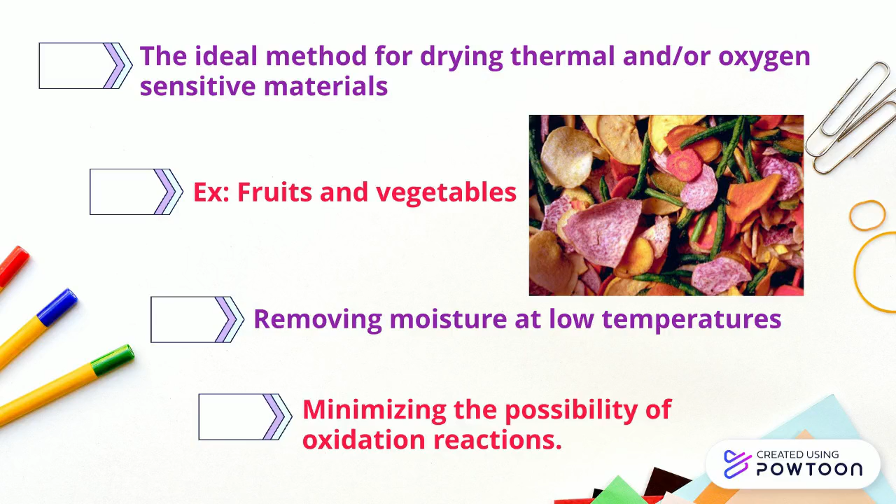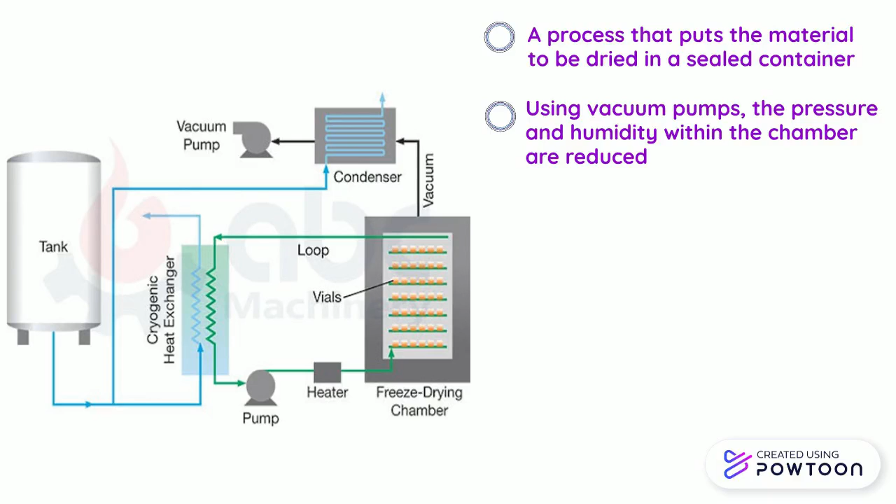So how does vacuum drying work? It is a drying process that puts the material to be dried in a sealed container. By using vacuum pumps, the pressure and humidity within the chamber are reduced. Normally, heat is provided by steam or hot water flowing into hollow shelves. Vacuum dryer is an indirect heat dryer, therefore, the heat is transmitted when the product is exposed to the hot side of the dryer.

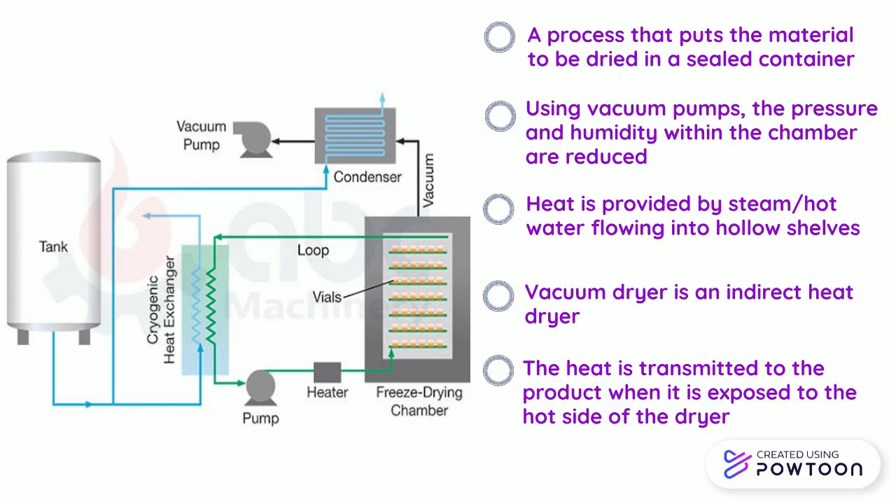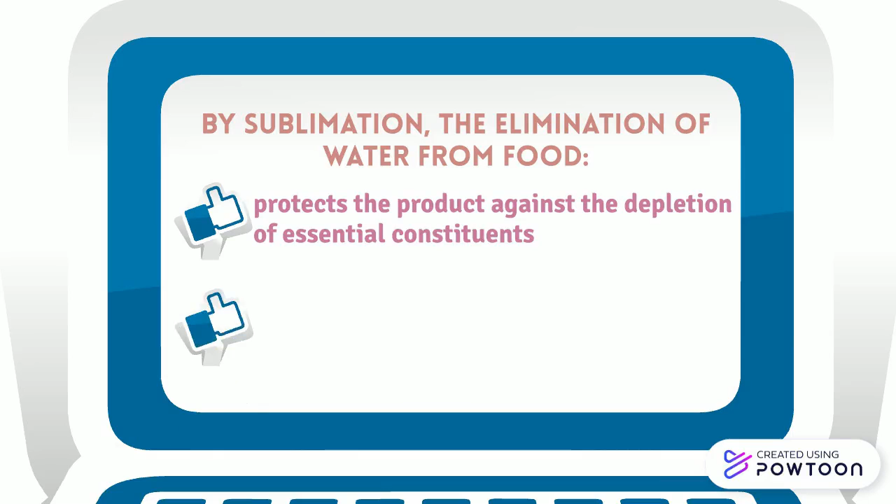Lastly, the fourth method is freeze drying. Freeze drying is a method of extracting water from a product by freezing it and then sublimating the ice to vapor, which is also known as lyophilization. By sublimation, the elimination of water from food protects the product against the depletion of essential constituents and against chemical reactions involved with liquid water withdrawal or vaporization.

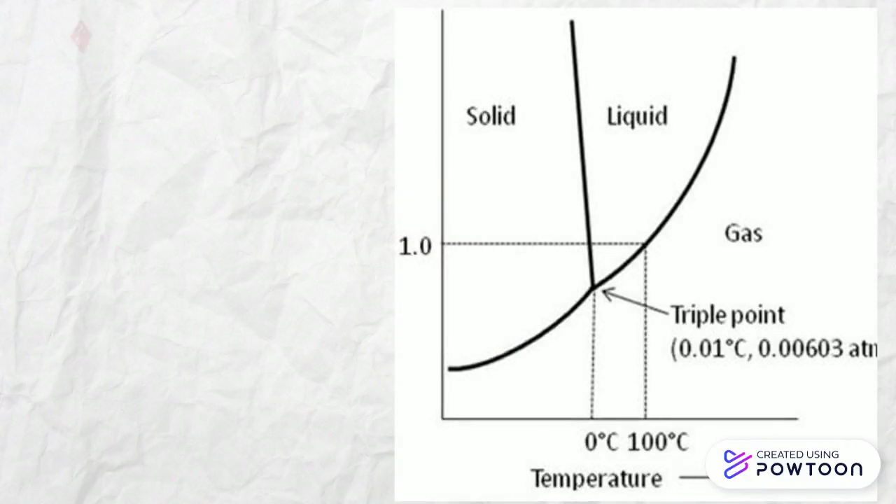This figure shows the schematic diagram for three phases of water. The schematic diagram of water indicates that two phases coexist in a line under the specified conditions of temperature as well as pressure. Meanwhile, all three phases coexist at the triple point at 0.01 degree and 0.00603 atm. This process is carried out at temperature and pressure below the triple point in order to ease the sublimation of ice, thus omitting the liquid phase.

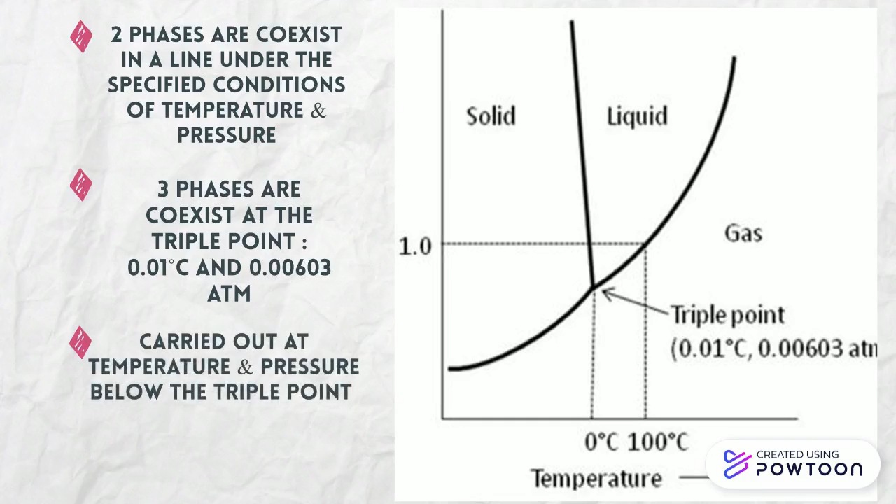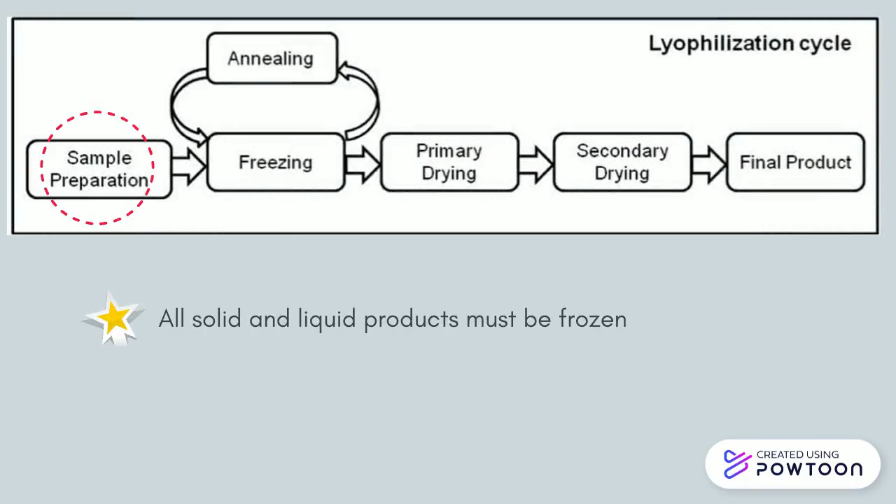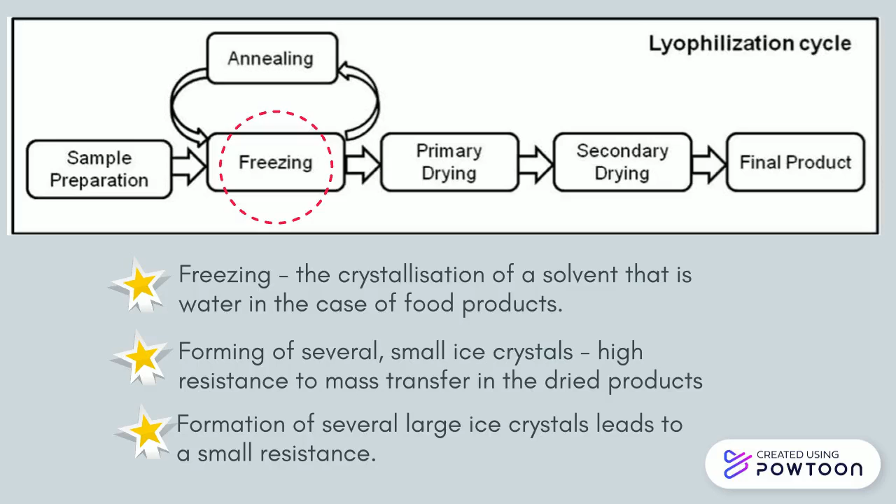Next is the steps involved in lyophilization process. Firstly, during sample preparation, prior to freeze drying, all solid and liquid products must be frozen. Next, freezing is the crystallization of the solvent, that is water in the case of food products. During freezing, the forming of several small ice crystals leads to a high resistance to mass transfer in the dried products, while the formation of several large ice crystals leads to a small resistance. Annealing, which is sometimes used for crystalline material, is an optional step for this process.

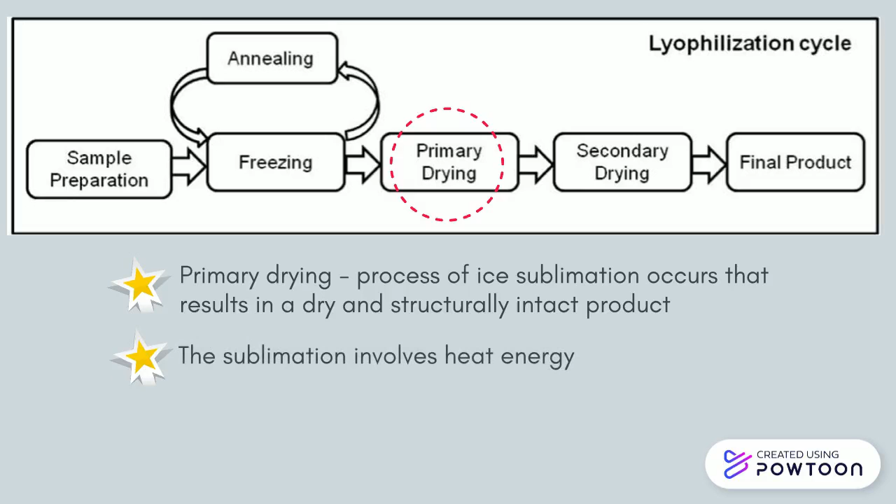After that, primary drying, where the process of ice sublimation occurs that results in a dry and structurally intact product. To push the phase change from solid to gas, sublimation involves heat energy. During this phase of drying, all types of heat transfer, conduction, convection, and radiation must be taken into consideration. Water molecules that are bound to the substance remain in addition to the free ice that sublimated during primary drying. This water is eliminated during secondary drying, known as desorption. Desorption occurs under reduced pressure along with simultaneous heating of product to the supposed water content.